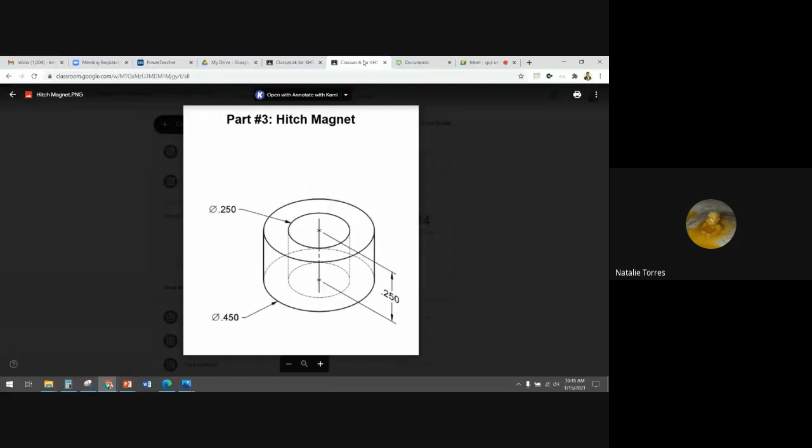Okay, so today we're making two parts: this hitch magnet, which should go pretty quickly, and this axle peg, which will kind of be tough. Let's start with the easy one.

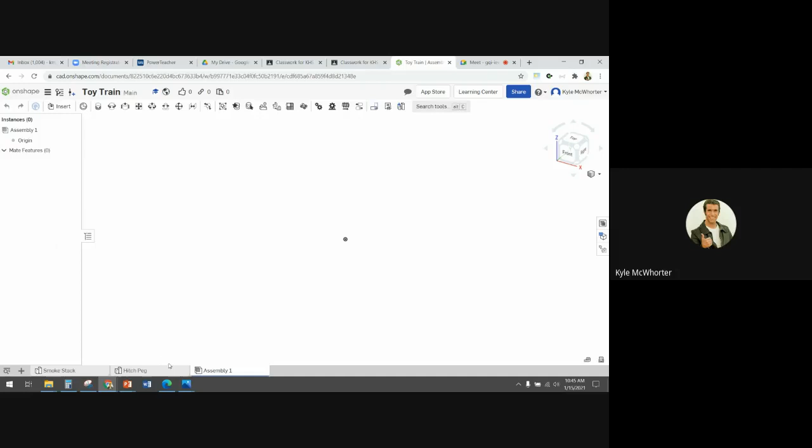So I am going to open up my toy train document. I've got my hitch peg and my smokestack in here. So I'm going to use the plus sign down here to add a new element, a new part studio, and I'm going to rename this part studio to be Hitch Magnet Studio.

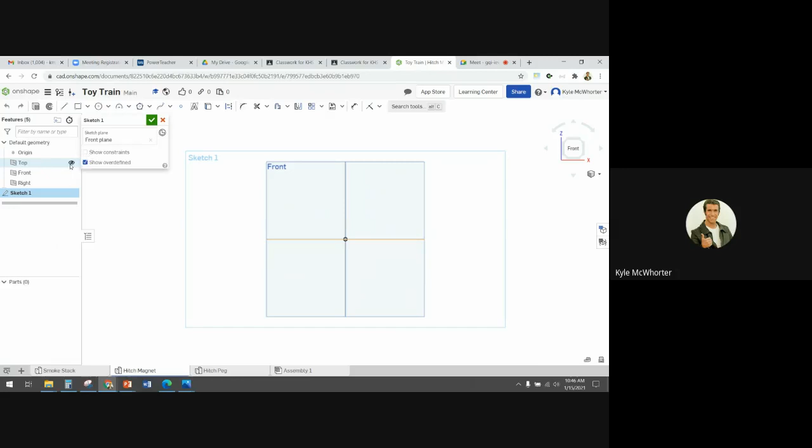I'm going to make my sketch on the front plane. I'll click front plane, make a sketch, push in, and then I'm going to hide the original planes. We're going to make two circles, dimension them to be 0.25 inches and 0.45 inches, and then we'll do an extrude of 0.25 inches. So we'll start by drawing the two circles, then accept that sketch and do the extrude.

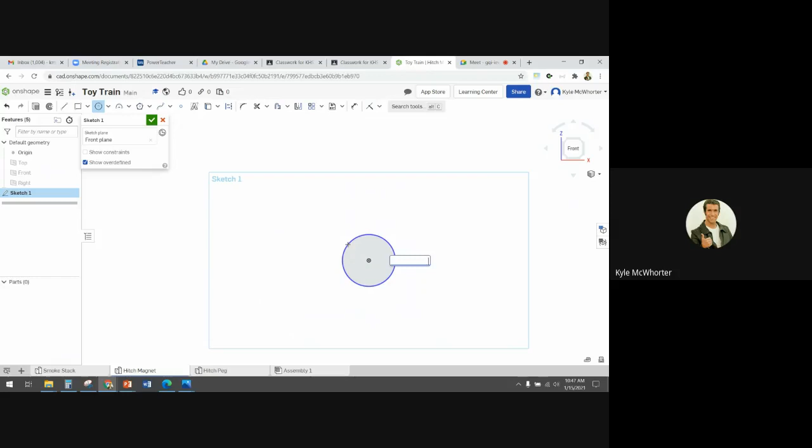So I'm going to grab my circle tool, starting from the origin. You can actually do this if, right when you click to place the circle, you just type in 0.25, and it puts the dimension on for you. Same for .45.

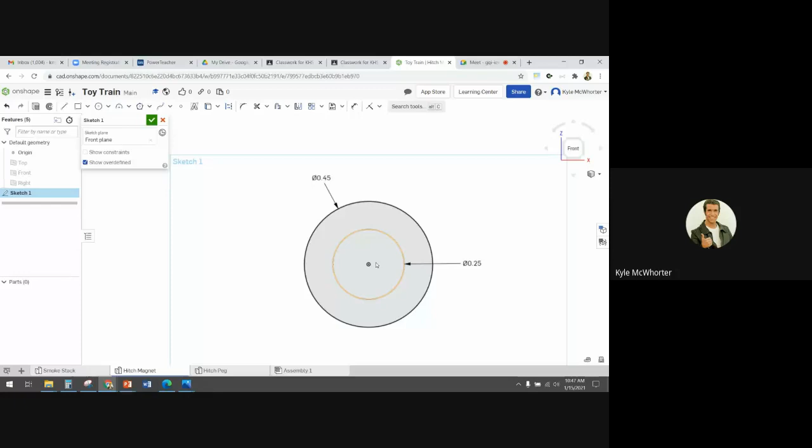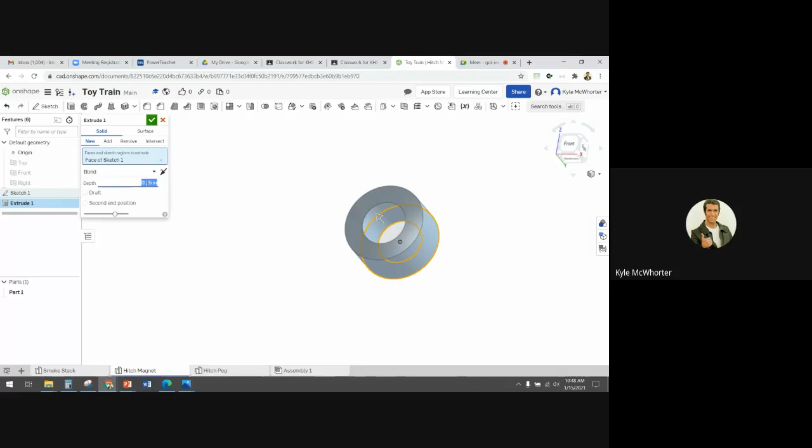So here is my sketch. I got one circle with a diameter of 0.25 and one circle with a diameter of 0.45. So I'm going to accept that sketch, then do an extrude. I'm going to select that outside ring there, and the depth will be 0.25. So our depth was 0.25, the inside circle is 0.25, the outside circle is 0.45. So we have the hitch magnet here.

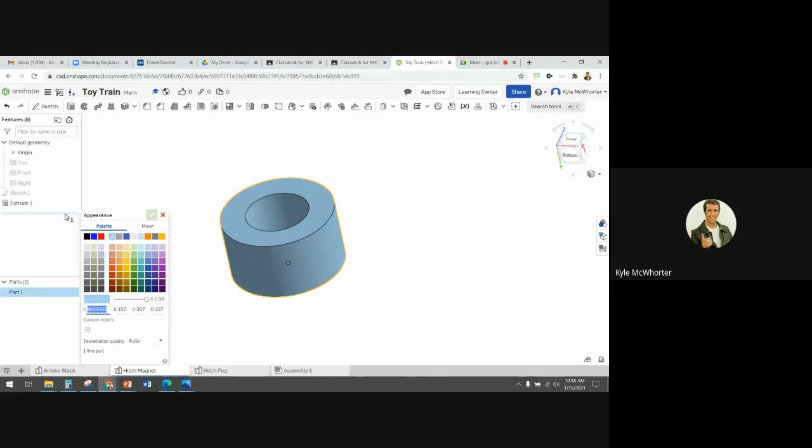All we're going to do is assign a material. So assign material, and for this one I'm going to type neo - the only magnet material I know of in here is neodymium, and this is supposed to be a magnet. So neodymium, accept. And then I'll change the appearance to be that. All right, so now I've got my hitch magnet. I'm done with this one.

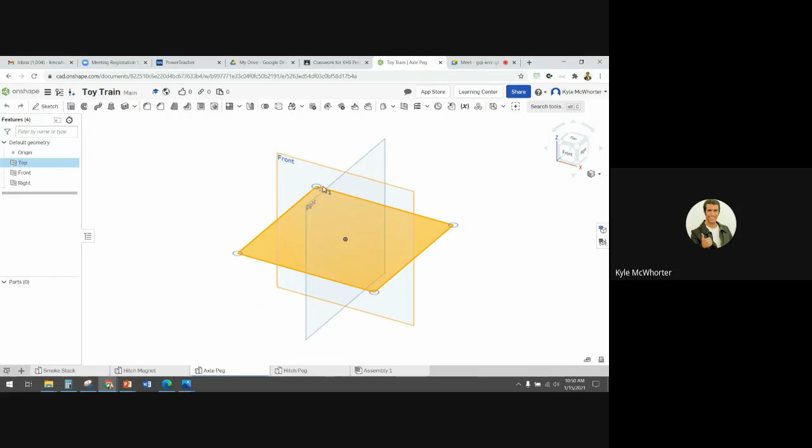So I'm gonna make a new part studio. I'll rename it to be axle peg. And then I'm gonna make this one on the right plane - wait, do I want to do that? No, I want to do the top plane. It really doesn't matter, just the orientation that it'll end up in matters. So I'm just gonna pick the top plane and sketch.

I'm gonna hide the other planes, push N to get normal. And now I am going to draw the cross section of this bolt. I'm going to start at the bottom and work my way up, starting at the origin down here. So this bolt kind of looks like - oh, I need my line tool.

We've got the bottom of the bolt. So we would come out kind of horizontally, then we would need to go up.

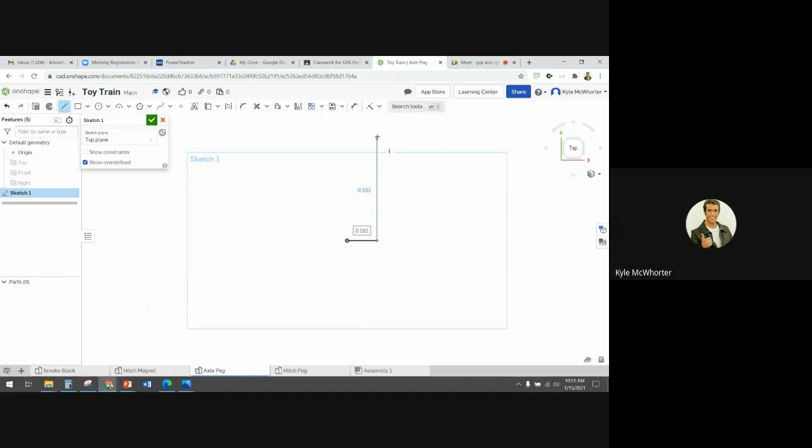So that will give us the long part of the bolt. Now we need the head of the bolt, and then there was this little vertical part, and then we need an arc.

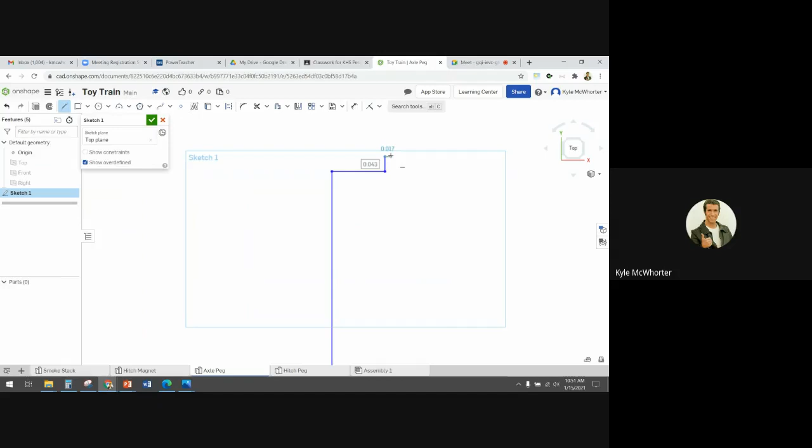Let me do the other lines. We have a line coming from here, this will be the center line of the bolt that we would revolve around. And then we need a horizontal piece for the flat top of the bolt, and an arc going between these two. Let me get my arc tool.

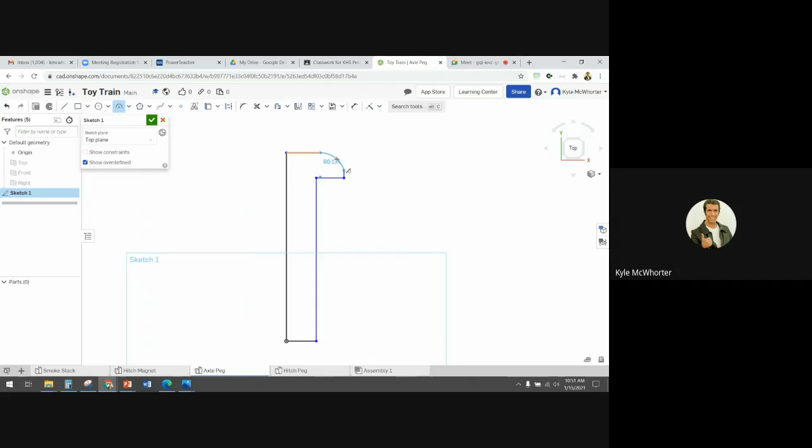Just be careful when placing the arc that you don't put any constraints on it, because we don't want any tangent constraints on either one of those, since we weren't told to do them. So place it somewhere where we don't have automatic constraints being generated.

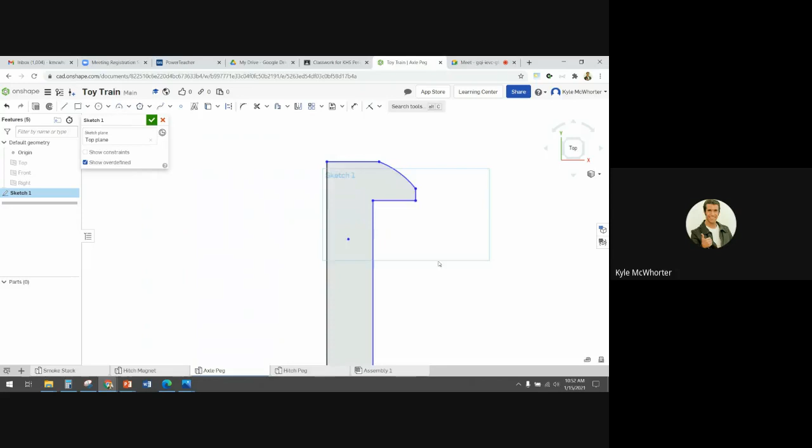Right here it says quarter 20 UNC by 1 inch. This means that this bolt is a 1/4 inch in diameter, so 0.25 diameter. There's 20 threads per inch, and the threaded part is 1 inch long. So we need the diameter of this to be 0.25, 1/4 of an inch, and the length of this part to be 1 inch long.

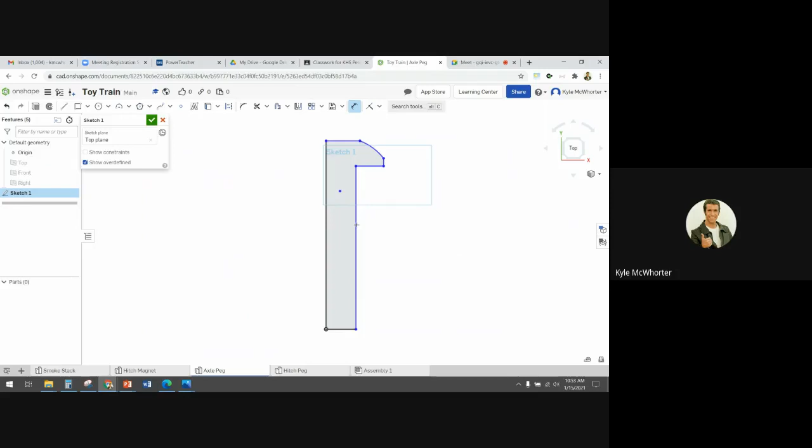So if we come back over, the length of the threaded part would be the length of this line. I'm going to put this dimension to be 1 inch.

And then the bolt part, the threaded part of the bolt down here, is supposed to have a diameter of 1/4 inch. So in order to do a diameter measurement, I need a construction line.

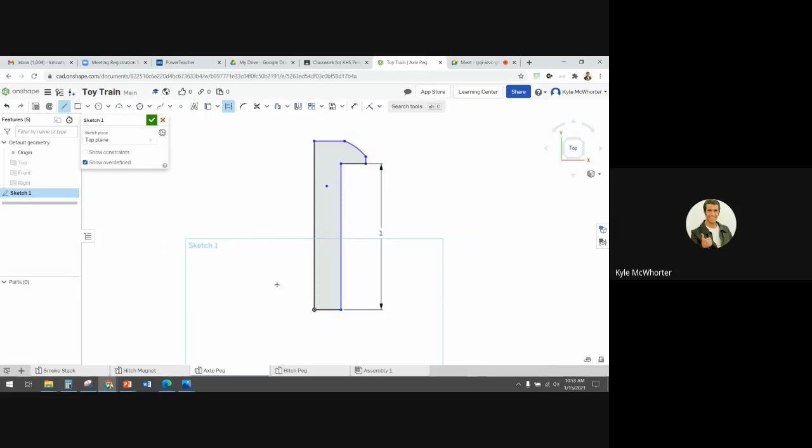I'll put it up here. I'm just going to make a vertical construction line. Got to make sure it's vertical.

And then to do a diameter measurement, I will click on that line and then the construction line. That will give us the distance between them. But if we move the cursor over here, it'll give us a diameter measurement, and the diameter was supposed to be 0.25. I'm going to move this down here so that it's not blocking anything.

All right, now let's look back at the picture to see what other dimensions we can put on here. The outer diameter of the head of the bolt is 0.422 inches.

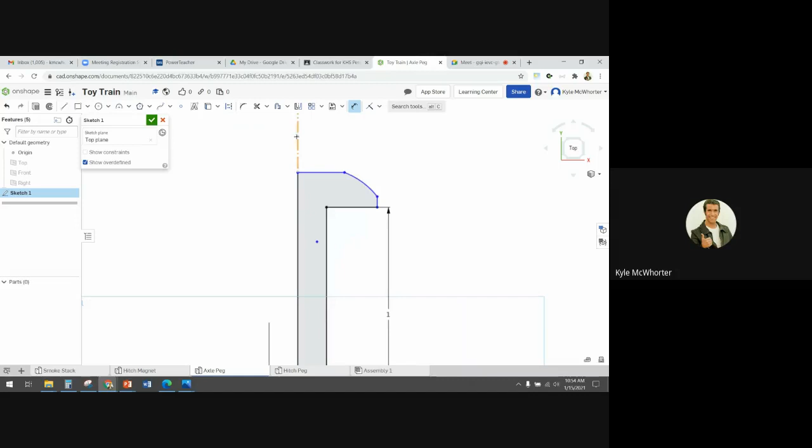So we can put that diameter measurement on there now. That would be measuring from here to the construction line, and then going to the other side to make it a diameter. So click here, click on the construction line, and if we go to the left, that gives us a diameter measurement, and it was 0.422.

All right, now let's look back at the picture to see what other measurements we can put on here. This right here, the SR 0.236, means spherical radius. So this part here has a spherical radius, which means if we just set the radius of the arc to be this measurement, and then when it gets rotated or revolved around, that'll make its spherical radius. So the radius of our arc should be 0.236.

And what else do we have? This right here is information about the hole here. So it's a hexagon socket, and the measurement is 5/32 of an inch across flats, and the depth is 0.111 inches. We're not going to make that right now. We're just making the overall shape of the bolt, and then we'll cut that out with an extrude later.

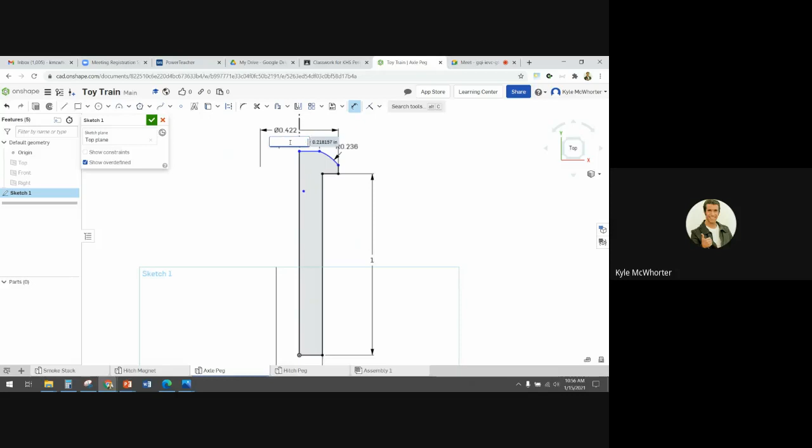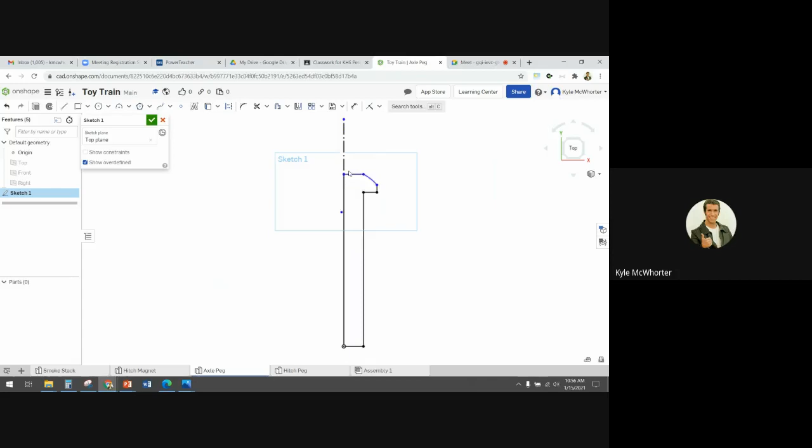And now you can see that if we try to move, the only thing that moves now is the height, the overall height of the bolt. So that's going to be the dimension that we need to put on there.

There might be a couple. I think this one here moves too. So we need to know the length of this little line here, and we need to know how tall the bolt is overall.

All right, so over here we've got some measurements. 0.031 is going to be the height of our little line. 0.031.

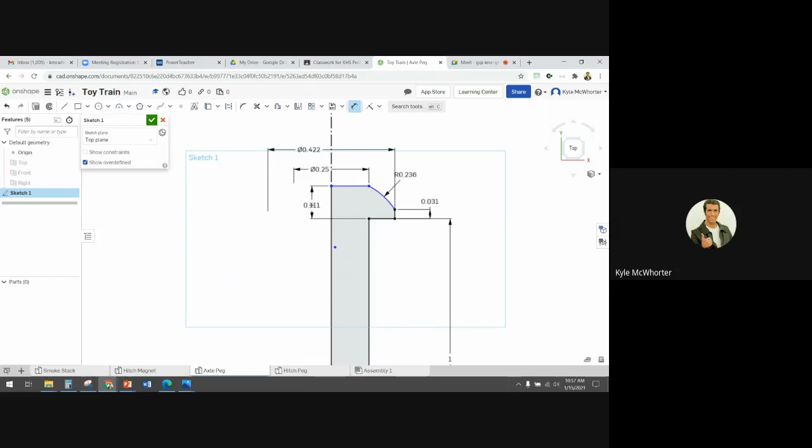0.125 would be the measurement from the top flat part to the bottom of the head of the bolt. So measuring from here to here is 0.125. And now all of our geometry has turned black, so everything is defined.

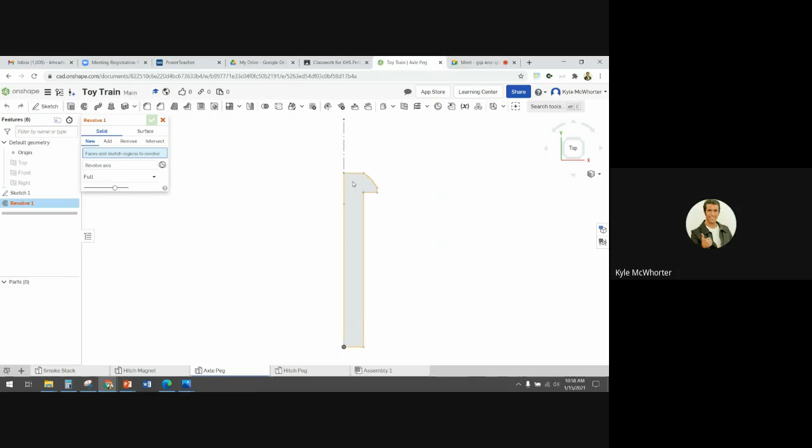That means we can accept our sketch. And now we can use the revolve tool. The face or region that we're going to revolve is this guy, and the revolve axis will be this construction line. Now you can see we've got the overall shape of the bolt.

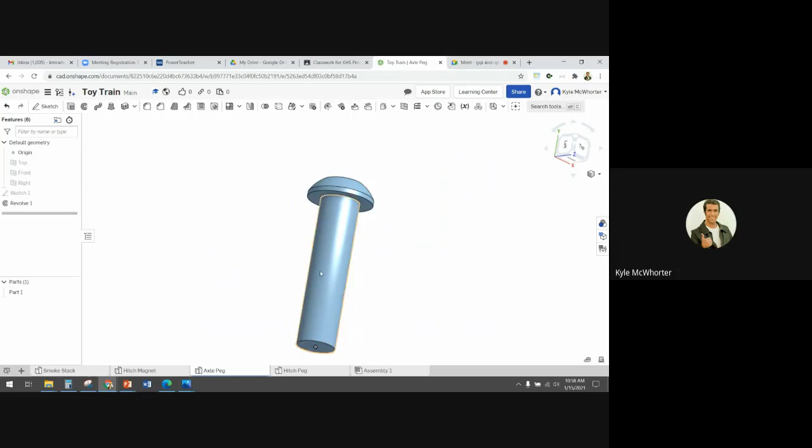Now we just need to cut out the hole in the top and do a chamfer on the bottom. If we were using Inventor, there's a setting where we can tell it what the threads are, but Onshape doesn't have threads, so we're just going to ignore them because we would probably just push it on anyway. Okay, so next, let's make the hexagon and cut that hole out.

So this is 5/32 of an inch across flats. What we're going to do is make a hexagon. There's a tool that makes a hexagon, and you can either make it using a circle inscribed in it or a circle circumscribed about it. We're going to do the one where the circle is inside, because then the diameter of the circle would be the distance between the flats.

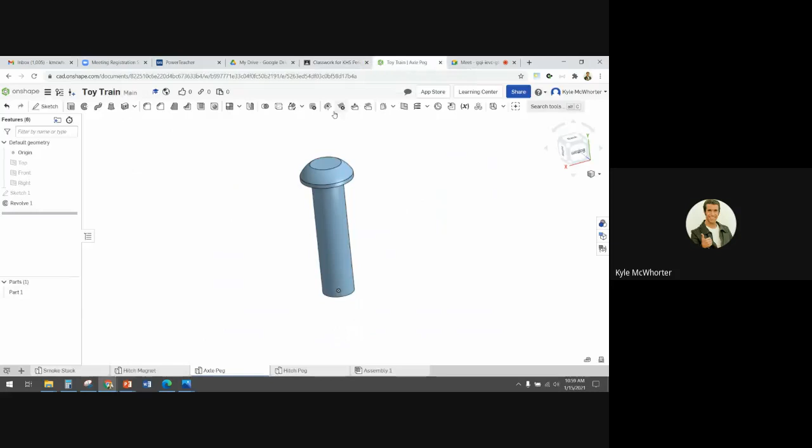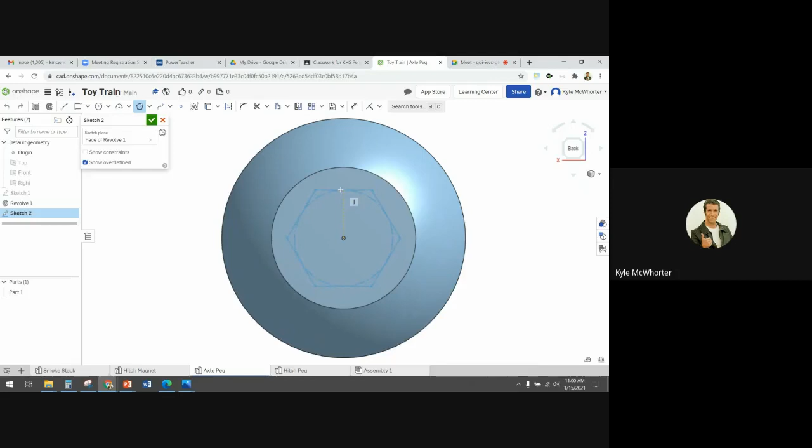So I'm going to come over here, select the top surface, and we're going to make a sketch. The polygon tool, if you hit the drop down, lets you choose between inscribed and circumscribed. We're going to do circumscribed so the circle's on the inside of the polygon. You click first to place the center, then your second click, I'll go ahead and let it be this vertical constraint, and click there.

It already says 6. So it looks like wherever you move the mouse, it'll add sides. We just want 6, so I'll click. So this has 6 sides, but I want the distance between flats to be 5/32 of an inch, right? 5/32 of an inch across flats. So that means the diameter of the circle should be 5/32 of an inch.

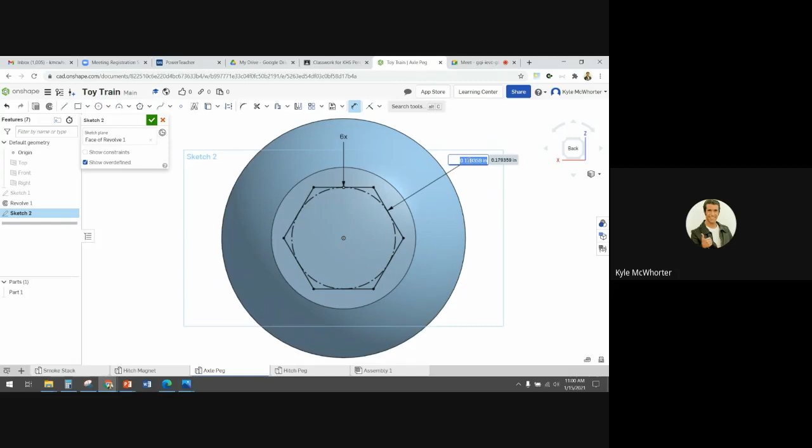So here's how I'll do that. Got my dimension tool, I'll just click on the circle, and set the diameter of the circle to be 5/32. All I'm going to do is write 5 divided by 32. When I hit enter, it does the calculation and gives you the approximation of 0.156.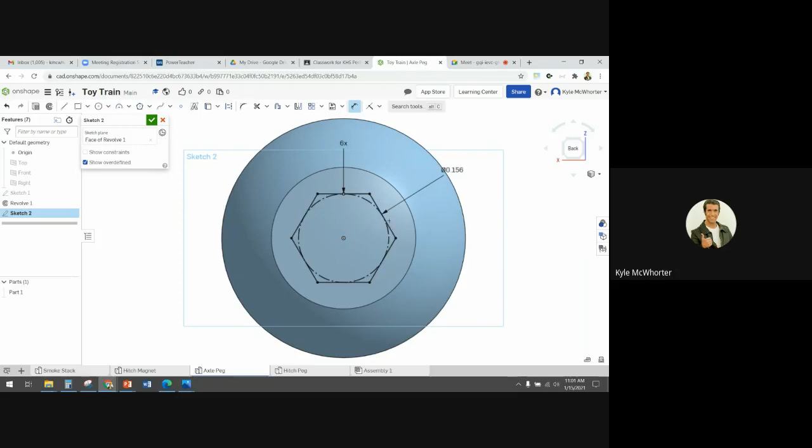But if you double click on it, it reminds you that it's still exactly 5/32 — it's just displaying a decimal approximation. You can see that since I had the vertical constraint there, and then put the diameter on the circle, this is fully constrained now. So we can accept the sketch.

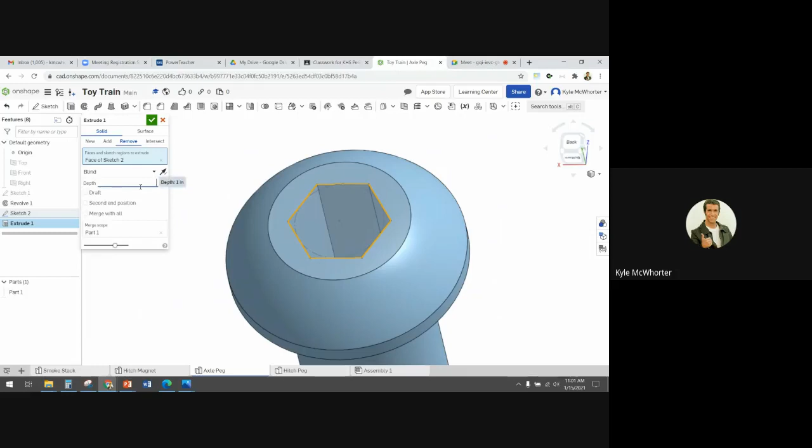And then we're going to do an extrude, but we're going to remove material. This is the shape that we want to cut out. But the depth is only going to be 0.111 inches. And so the cut will only go that deep. Accept. And now we've got that part on the top.

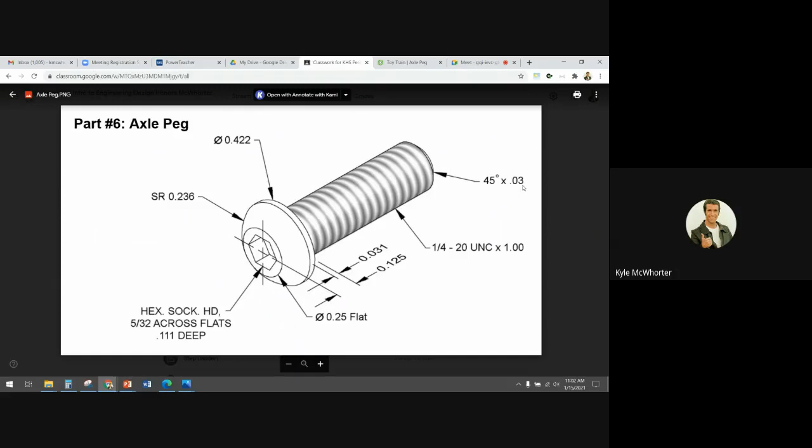So then the only thing left for us to do is put this chamfer on the bottom. This chamfer is given by an angle and a measurement — angle and a distance. 45-degree angle, distance 0.03 inches.

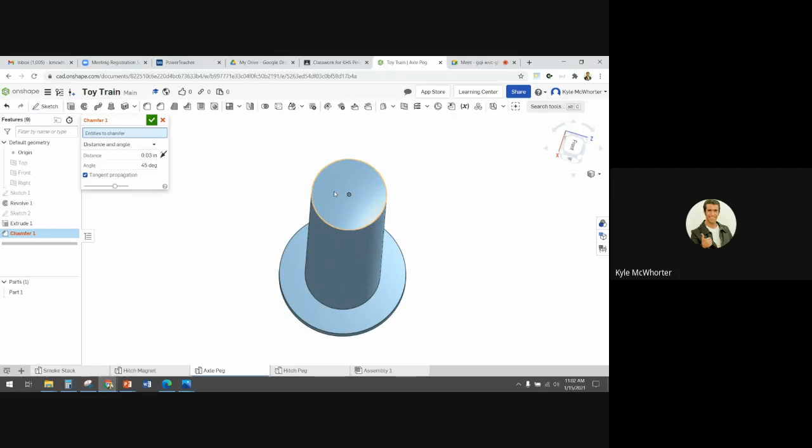I am going to select the chamfer tool. It says equal distance, I need to change that to distance and angle. Distance was 0.03 and the angle is 45 degrees. The entities to chamfer would be this circle, or you could just click on the top face and it'll do that same circle.

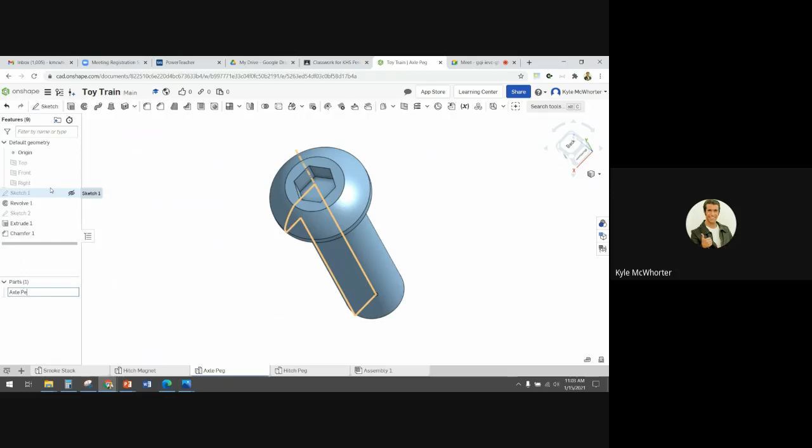And then you will, okay, rename this axle peg. And then assign material, the ABS. And we can make it some color that we like.